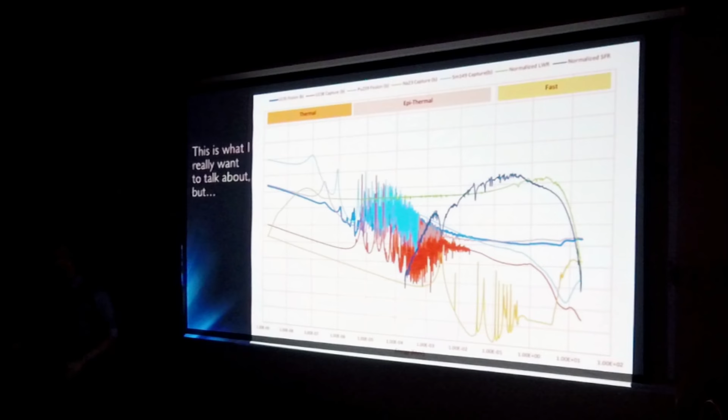So this is maybe what I really want to talk about. This is one of my favorite graphs. It's just a bunch of nuclear data, and there's so much physics in here that you can explain with just this slide. I could talk for an hour about it, but that probably wouldn't be that interesting to everyone here, although some of you might be interested. So instead, I really kind of want to lay some groundwork, and then we're going to talk about what could happen with nuclear technology.

So just to comment at the outset, I'm not a prophet of nuclear power. I'm not a true believer. There's definitely flaws; it's not perfect. There are no perfect solutions. So safety: Fukushima, Three Mile Island, Chernobyl, there have been accidents. There have been health effects from nuclear power. I'm not going to deny that. Nuclear waste is a real thing we have to deal with. Cost: if nuclear power stays as expensive as it is, it doesn't really matter if I advocate for it. No one will build it. People would rather have climate change than $14 a watt installed electricity.

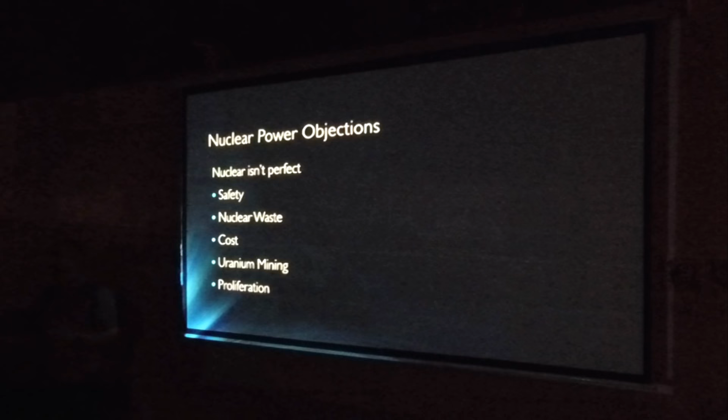Uranium mining has definitely a destructive past, and that's maybe one that could have a little bit more of a future. And proliferation is something that I actually don't personally find as compelling an argument against nuclear, but a lot of people raise it. So with all those objections, and I'm sure a lot of people have questions about those, why do I look past all of that and still believe in nuclear power?

And it's really this. So this is a screen grab of what the German utility puts out: the different sources of electricity generation by hour for a given week. And this made a lot of headlines if you're really nerdy into this space. January 2018 at 3 a.m., the headline said Germany gets 100% of their energy from renewables. And at 3 a.m. on a very windy day with low energy demand, Germany got 100% of their energy from wind and a tiny bit of solar. I think maybe it's solar thermal, I don't know why at 3 a.m.

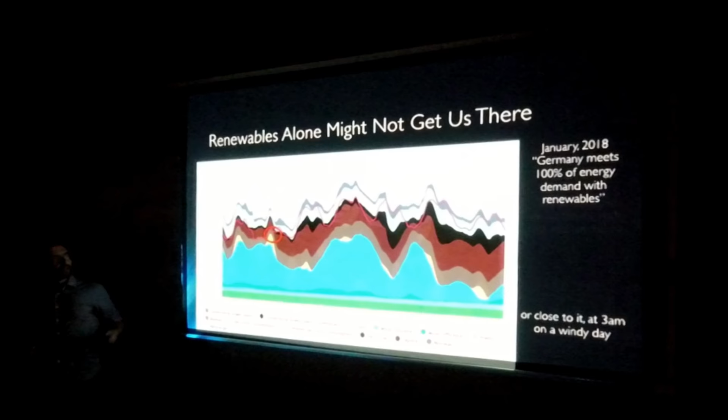But last time I gave this talk, I pulled up the week before that talk, and that was this. So this is a much more typical week. It was a cloudy week with not a lot of wind, and most of their power was from burning coal. So if we really want to fight climate change, we need a lot of power, and we need carbon-free power, or low-carbon power. So nuclear power comes with inherent risk, challenges, and costs. But tackling climate change requires us to make hard choices. There are no easy choices yet.

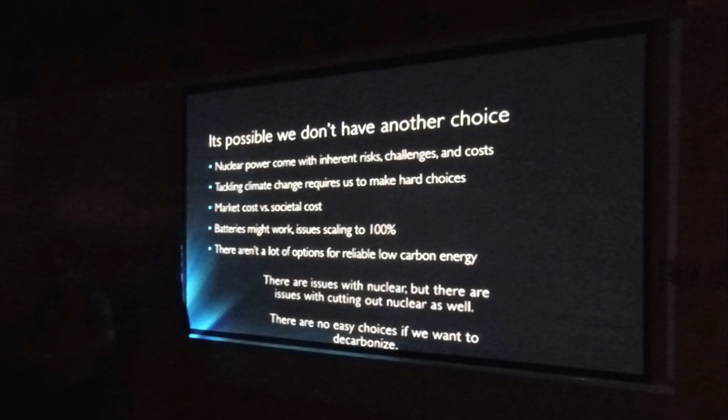Geothermal is very location dependent. There are other options at small scale, like wind, wave power, but they're not geographically scalable like nuclear is. There are issues with nuclear, but there are issues with cutting out nuclear as well. There's issues with shutting down our existing nuclear fleet. And there's no easy choices if we want to decarbonize. So that's pretty much where I'm coming from. Any point I just said can be debated ad nauseam. This is my groundwork for the rest of the talk.

So really, if you kind of buy that premise that we need nuclear, what is nuclear? What do we have today? What can we have tomorrow? So that's sort of what I'm going to talk about for the rest of this, but since I got through that fairly quickly, maybe just pause for a second. Did I totally lose anyone? No? Cool.

Oh, yeah. My question is, how do you handle situations where you need energy on demand? For instance, you might power on natural gas because it can be powered on kind of instantaneously, as opposed to something like coal that takes a little while longer. So how does this fit into that?

So as you look at scaling up renewable energy, for example, you sort of need dispatchable sources to cover that mismatch of, it's been 4 days since the sun has shone, you have this really unusually cloudy period. When you look at scaling up just pure 100% solar, you have to make this trade of how often do I want blackouts versus how many diesel generators and simple cycle natural gas plants do you want. Nuclear, you sort of assume runs as baseline. There are advanced plants that can load follow and play with renewables.

In terms of carbon intensity of, hey, I have a natural gas plant, but it only turns on once a year for 2 days. What's the carbon intensity of that versus building 10,000 more batteries? I don't know that answer, right? That's analysis I really want someone to do, but I don't quite have the time to do it. I have a feeling that there's a point where you'd say, wow, it'd be really nice if I had 20% that was always on to charge the batteries or something.

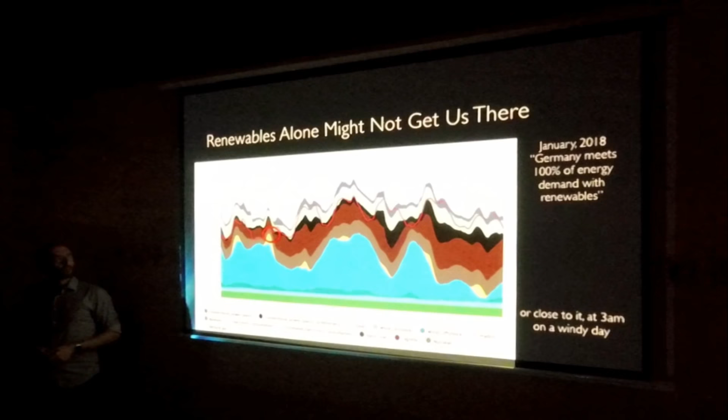Can we just go back to the slide of Germany's mix? Can you comment on the nuclear composition there? Yeah. So nuclear is, I believe this one. So Germany had somewhere like 20 nuclear reactors. Nico, you can correct me if I'm wrong. But order of magnitude there.

After Fukushima, they decided to shut all their plants down. They've shut down about 8, and they have 12 left, so it would be 20. They're about halfway through turning off their entire nuclear fleet. I want to say 100%, but I'll be conservative and say more than 90% of the energy that they've displaced by shutting off nuclear has been replaced with coal. And not high-grade coal, but low-grade coal.

So there's Germany. You're sort of indicating on Germany. There's a lot of fun articles to read out there on their carbon intensity. They're abandoning all their carbon reduction goals, even as they build solar. It's the largest expenditure on renewable energy ever over 10 years, and their carbon intensity is going up almost entirely because they're shutting nuclear down. And as they build non-dispatchable renewables, they're having to back that up with natural gas.

So Germany is sort of a pillory post of people saying, hey, don't shut down all your nuclear plants because of their carbon intensity. Everyone's like, oh, Germany hit 100% renewables, but people track renewables, and that's a big pet peeve of mine. They say renewable portfolio standards, we'll talk about in a second. It's like, hey, we have 50% renewables, but what's your carbon intensity? Well, it's gone up. But we have 50% renewables. So did that answer your question at all? Yeah, it was a more general comment.

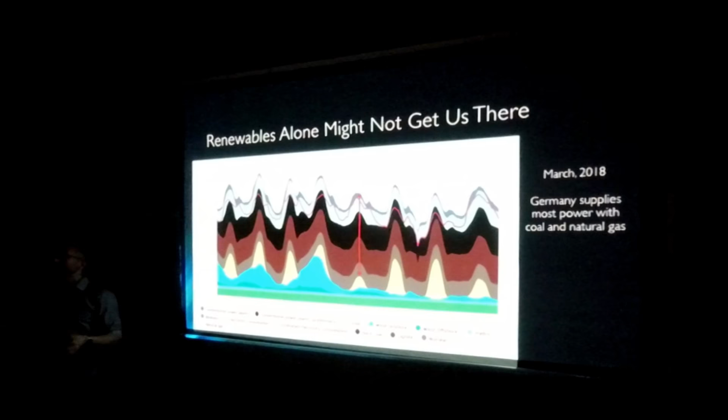So I would be totally happy, and coincidentally Steven Chu totally agrees, his ideal energy mix is like 80% wind and solar and 20% nuclear. If we maintain 20% nuclear, I'll be very happy. Right now we're looking at going to 0 in the next 30 years. And that's globally, right? The US is 20%, globally it's like 5%. So having that power to cover the night, to charge the batteries overnight, or when it happens to be a cloudy day in Morocco or Scandinavia, which happens really frequently. That's sort of how I feel about that.

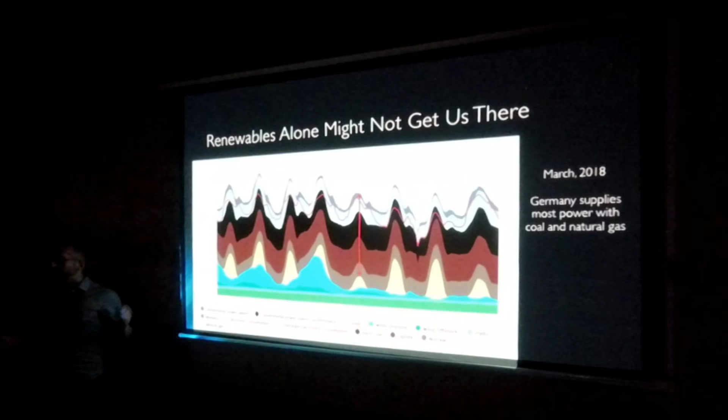So just domestically in the U.S., what is nuclear power today? There's 99 operating reactors, but a really emblematic one is Palo Verde. Palo Verde is, personally as a nuclear nerd, a super cool plant. It's the largest plant in the world that's not cooled by a natural source of water. 100% of its cooling capacity comes from City of Phoenix sewage.

So City of Phoenix sends its slightly treated sewage water to Palo Verde that cools the turbines, and then they send that back. And so if you actually drive west on 10, you will see this huge plume of steam coming out of the desert, and it's City of Phoenix sewage water.

It was one of the most recently built plants. It was built at a pretty reasonable $3.60 a watt, which is very comparable with solar, wind, natural gas plants today. I mean, natural gas can come in a little cheaper than that, but for the carbon intensity, it's pretty good

bang for your buck. The forward operating cost of electricity, so that's not counting the already paid debt, that's future debt service and fuel, operating maintenance, etc., is 4.3 cents a kilowatt-hour, which is again very competitive considering the reliability, and it produces its nameplate capacity 95% of the time compared to wind and solar, which is about 20 to 30% depending on where it is.

Who lives there? What? Who lives around the Palo Verde plant? So the town of Palo Verde is right there. I've driven there. It's actually very lovely. Yeah, people. So every nuclear power plant today in the U.S.

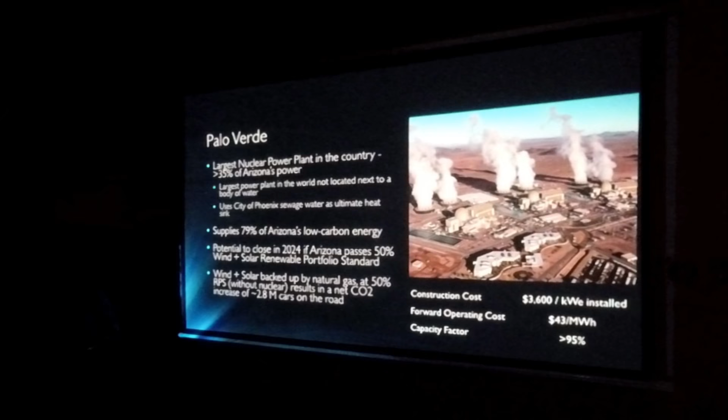And that's sort of one plant, and then domestically, 20% of U.S. electricity on average in megawatt hours is produced by nuclear. We're the largest by capacity. We have about 100 plants. France is the largest by percentage. They get about 70% of their power from nuclear. And relative to our existing low carbon sources, solar is 1.3, wind's 5.5, hydro 6.5. Those are going up, but it's just the scale.

And this goes back to when Three Mile Island happened, there were, I think, 100 reactor orders and 40 under construction. Ten years ago, we had 104 plants. Had Three Mile Island not happened, we would have about 250. We'd have about 50% of our power in the U.S. supplied by nuclear. Almost all those plants that were on order were canceled after Three Mile Island.

And that's actually one of the challenging things about economics in today's nuclear power plants: a lot of the sites were built for 6 reactors. So Diablo Canyon has cooling capacity for 6 reactors, but only 2 reactors, and that increases operating costs. So there's strong market pressures from natural gas and renewables. Being in the Bay Area, there's a lot of nuclear engineers who are like, we have to fight renewables. No, we have to work with renewables to fight climate change. We have to fight natural gas and coal. And natural gas is really cheap right now and putting pressure on a lot of generators.

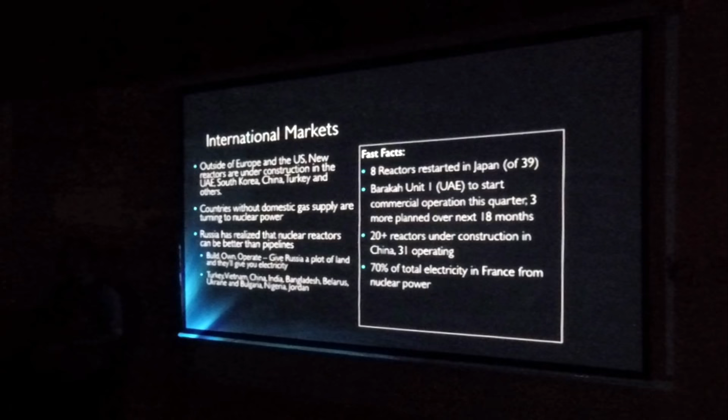So, moving forward, we can do nuclear cheaper. The TEPCO plants, those are basically generation 2. Mark 1 BWRs are plants that were designed in the 50s, 60s, built in the 70s. Mark 1 is Gen 2. Gen 1 is pretty much all offline. That was like the Navy building power plants to figure out if they could do Shippingport, things like that. Gen 2 started to get built in the 70s. Gen 3 started to get built in the 80s. Each of these are learning lessons from previous reactors, but there are 10 to 15 years between generations.

Today, Vogtle and Summer, AP1000, those are kind of Gen 3+. Vogtle and Summer, this is not a good story. Summer is now canceled. It will be infinity dollars a megawatt because the denominator is 0. And Vogtle will be like 14 to 16, fingers crossed, please don't bankrupt the entire state. If you look internationally, most focus on the USA and France. And the cost of building a reactor has actually gone up over time. There's a bunch of reasons for this.

South Korea, there's a paper by Jessica Lovering, which is really great, looking at construction costs of current gen plants. South Korea has actually managed to do something which every other industry has managed to do, which is have costs go down over time as they get used to building things. The conclusion of the paper is they picked a design, thought this is good enough, and we're going to build this thing. They've made minor tweaks to it, but it's the same plant, same construction, same suppliers, everything.

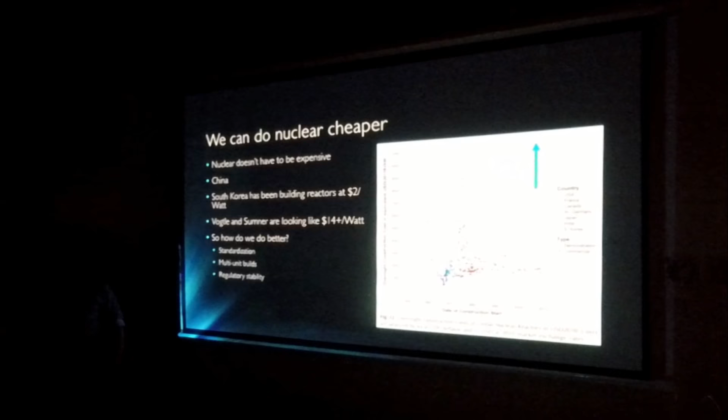Okay, well, I am definitely now behind schedule given the first one. So I'm going to try and cover some nuclear engineering basics really quickly, and then I'll try and get to sort of the next generation of nuclear technology.

What is my time? Was it 9:15? Okay. So I'll try and be done by 9:45, but if anyone has to go, I won't be offended.

So just to understand kind of what fission is and isn't. So uranium is the heaviest naturally occurring element. If you hit it with a neutron, it'll split. It'll split into 2 smaller things and release a bunch of neutrons. Those neutrons can hit other uranium elements, cause fission. That's a chain reaction. If that chain reaction sort of propagates, you're sort of stable.

The heat, the energy, the actual source of the energy is these 2 fission products slowing down. So they fission, they're moving like 3% of the speed of light, and they slow down, they release a lot of heat. That's the heat from fission. And sort of the excess neutrons keep the reaction going.

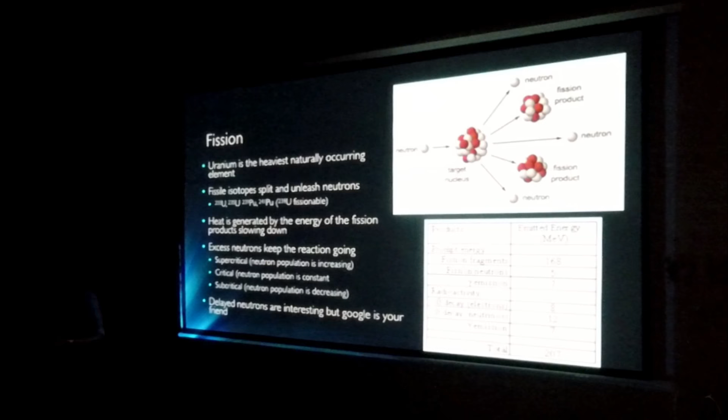So not every one of those neutrons is going to hit another uranium atom. Some will fly out, some will get absorbed in steel, some will get absorbed in water, oxygen, whatever, anything you have in there. As long as you have enough of those neutrons hitting uranium to keep the reaction going, you sort of have a nice stable power. Delayed neutrons are really interesting if you guys have like 2 hours to kill on Google, but not tonight.

So this is a basic schematic of a really typical nuclear power plant. So you have the core, that's where heat is generated. The coolant circulates through the core, goes to a steam generator, transfers heat, boils water, makes steam, steam spins the turbine, turns a generator, generator powers your PS3.

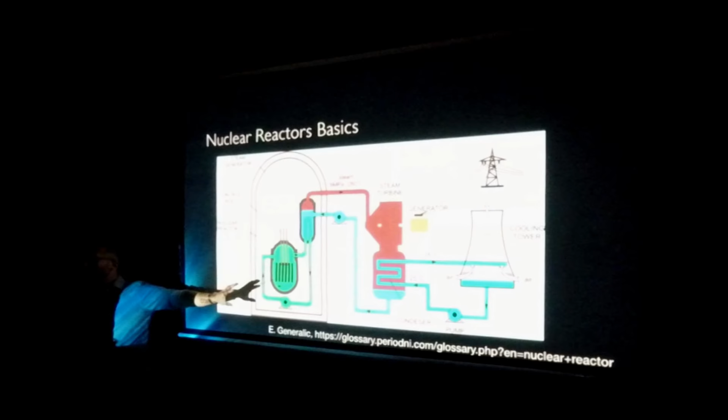And the water ends up going to a cooling tower, or if it's an older plant, an ocean. Open water cooling is definitely out of style nowadays for a number of pretty good reasons. And the water comes back to the steam generator, gets boiled to the steam turbine. If you take everything to the right of this line, this is a coal plant, right? Coal plant, you burn coal, you make steam, spin the turbine.

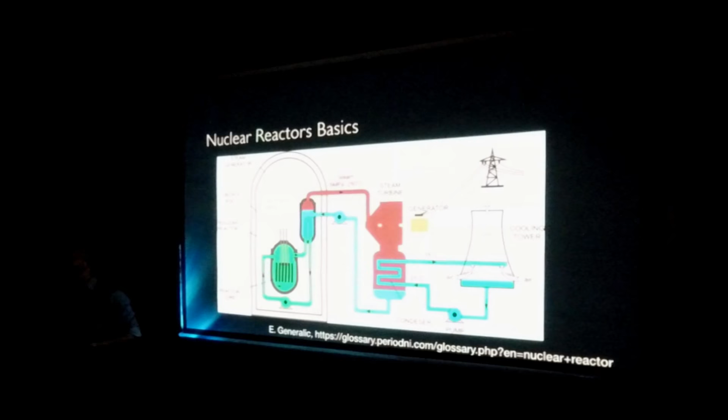The thing that makes a nuclear reactor hard is that you can't turn this off. If you cut the oxygen to a coal plant, it goes to 0 power. It's still hot, and it has to cool down, you have to provide cooling, but it's not producing any more energy. You're not adding energy to the system.

The thing that makes designing a nuclear reactor hard is when you stop the chain reaction, you don't go to 0. You go to 7%, which is a lot of power. Where that comes from is those fission products decay, and when they decay, they release heat. The fission products have all kinds of radioactive decays, and some of them are very energetic. So you continue to get heat, about 7% in normal operation, from these things that are not part of the chain reaction. They're just sitting there.

And so when you drop the control rods, you shut the reactor down. So going supercritical and exploding like a bomb is not a credible accident in any plausible modern reactor design. However, that's pretty much what happened in Chernobyl. That was a really bad design, and I would love to talk for like 2 hours about everything wrong with Chernobyl, because I think it's really fascinating. But in most Western and modern reactor designs, that's just physically impossible.

But what happens is 1 second after you shut down a typical large-scale 1 gigawatt nuclear power plant, you're producing the same amount of energy as the fuel consumption of a 747 in flight. So 747 in flight, cut the fuel lines, burn that in a fire. That's what's being produced as heat in the core 1 second after shutdown. And 1 day after shutdown, you're the equivalent of the world's largest, most powerful locomotive, just the fuel consumption of that burning as heat in the core. The problem is, 1 month after shutdown, you're only at the 9th most powerful locomotive.

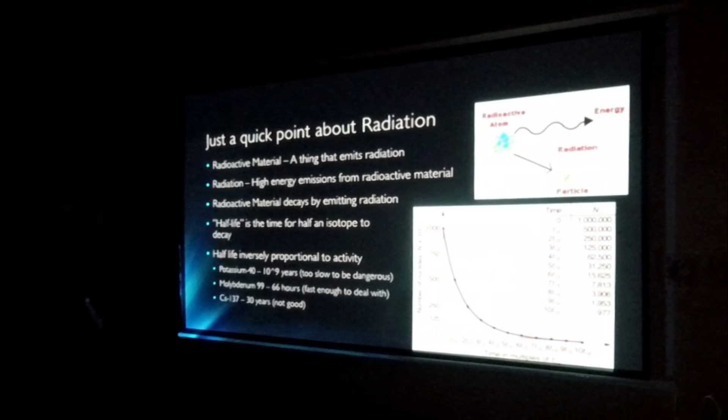I'm going to keep going. Yes. So, what are we betting on? So if you ignore all the doom and gloom and all the issues, and you really say, I believe in nuclear, we can save the world, we can make low carbon energy, what is really nuclear? This is sort of what I wanted to talk about.

So there are, I would say, 6 options. Small modular reactors, which if you've been in the space, were kind of all the craze until about 4 years ago, and they sort of dropped down a little bit. Molten salt reactors, which are like the internet's favorite reactor. Sodium fast reactors, which are physicists' favorite reactors.

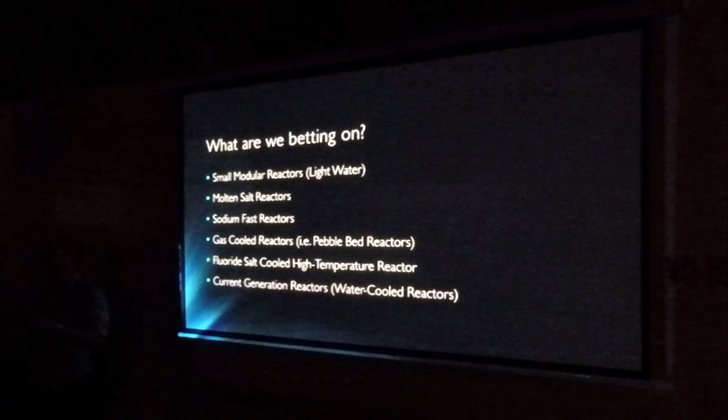Gas-cooled reactors, which, for lack of a clever name, I call Germans' favorite reactors, because Germans invented them. And fluoride salt-cooled high-temperature reactors, which is the longest name, so that's cool. That's what I work on. And a lot of people wouldn't, but I put the current gen reactors, because of everything I talked about with South Korea, and I'll get to that maybe later if I have time, which I already don't have.

So small modular reactors, what are small modular reactors? It's essentially the same technology, the same fuel assemblies, the same control rods, everything that you know works about a light water reactor, but smaller. And the reason that smaller helps is a few-fold. There are a lot of arguments people make. You can really simplify construction. You're now dealing with smaller components. You don't have to go with these specialized ones.

The reactor vessel from Palo Verde was forged in South Korea, the only forge in the world that can make 800,000-pound reactor vessels, and shipped by barge across the ocean, delivered every night, moving 30 miles by truck. It's a huge ordeal just to move that component. Going to a smaller reactor means you can make them in the United States with more traditional manufacturing technology.

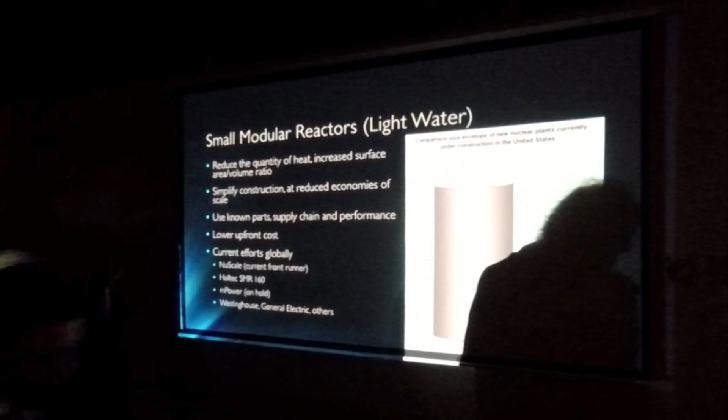But the big thing is you're really reducing the amount of heat. So if you have a 1,000 megawatt reactor, you have to deal with a 747's decay heat. If you have a 100 megawatt reactor, you have to deal with like a Cessna's decay heat. Way easier to deal with. And the big thing is really using known parts, supply chain, and performance, but dramatically improved safety. So it's all the best technology without some of the challenges.

And then the other big argument is financing costs. So if you build a 1 gigawatt plant at $14 a watt, that's $14 billion. That's pretty expensive. On the other hand, even at $14 a watt, an 80 megawatt plant is going to be a lot cheaper just in absolute terms. More utilities can afford that financing. The payback period, because hopefully you can build these things faster, is lower investment, faster time, and hopefully it makes the economics a little more amenable to both smaller economies and current financing.

How does it improve on safety? So it improves on safety in a couple ways. So the first is really the amount of decay heat, and the surface to volume ratio is better. So you're producing less heat with more surface area. You can have more cooling water.

If your reactor is really large, the center fuel pin is the one that's going to fail, because it has to move that heat out through the entire reactor that's also generating heat. If you take that reactor diameter down a lot, the length of the fuel pins, the diameter, and the fuel assemblies, it's much easier to get that heat out. So NuScale, which I'll talk about in a second, they're kind of a good emblematic one, and I have a diagram.

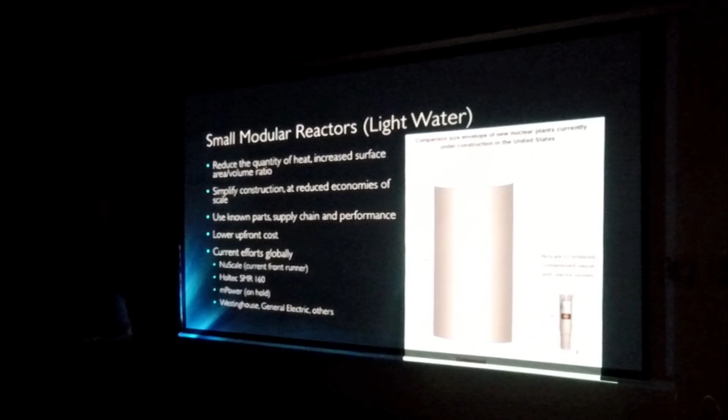So there's sort of NuScale, which is really the current front runner, and Holtec, mPower, Westinghouse, GE just made some news for something that I don't think they should have been used for. But there's other kind of people. There was this huge push to develop these SMRs, and everyone was like, these are going to change everything, and they didn't change anything because no one built them.

So NuScale, though, they have a signed contract or letter of intent, memorandum of understanding with UAMPS, a Utah utility. It's going to be co-located with a wind farm. The plant is designed to load follow the wind farm. So as the wind picks up, this plant will come down. It's like all these things everyone wanted from a nuclear utility.

And the way you see the safety is they've gone low enough power and they've sacrificed efficiency that it's powered by natural circulation. There are no pumps. And so if the power trips, nothing changes. It continues to circulate at full power. Just really reduce the volumetric power density of it. And they put these modules, these sort of self-contained modules, in a giant pool. And so there's this huge volume of cooling water and a steel lined pool and seismic reinforcements, etc.

The challenge is, so here's kind of their ultimate safety case. If you lost all power and everyone left, eventually the water would boil off, but by the time the water boiled off, the decay heat goes down, and you can cool by air cooling, and you're sort of infinite walkaway safe, unlimited walkaway safe. People have all these qualifiers, but there is nothing you need to do. You don't need to drive a fire truck up. You don't need a hose. That's the goal of every reactor going forward, is to totally change all of the accident scenarios and remove them.

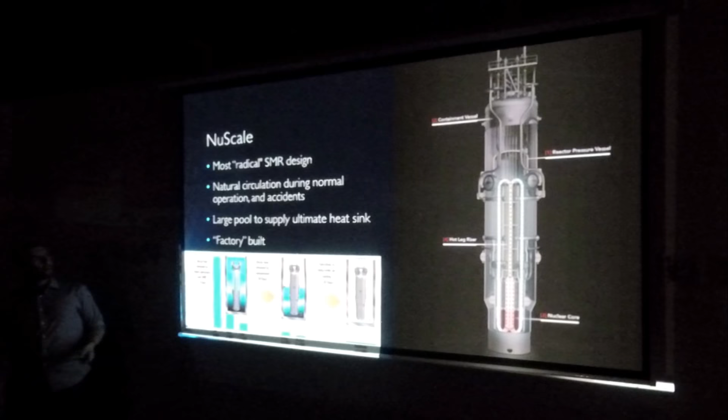So the benefits, as I said, it's an established technology base. It's an established licensing path, which is a huge deal in the U.S. People talk about licensing being really challenging, and it 100% is. And the technology challenges, the risks, the costs, the supply chain, all that's really well understood.

Ideally, these are small enough to be quote-unquote factory built, although no one's quite addressed the chicken and egg of, hey, I want to build a factory. How do I afford the factory? I'll sell a bunch of reactors. How do I sell the reactors? You need to have a factory. So that's something that hopefully can just get fixed by money, but who has that money?

And then kind of passive cooling or sort of these low power reactors really change the game in terms of safety. The big challenge is it's fundamentally the same technology limitation. So everything you don't like about water reactors is just kind of being engineered around. It's not being solved and not being changed.

NuScale is optimistically targeting $6 a watt. That's optimistically for a plant that's never been built. Not going to happen. I feel 100% confident they will not hit $6 a watt if they go forward. It's too much. They still need a ton of money to go through licensing. They're going through a traditional licensing pathway.

And many costs of nuclear build do not scale with power level. So even if you reduce the size of the power plant, a lot of licensing costs, fuel costs, security costs, they don't really scale with, hey, we have a smaller plant. The cost should be, it's 1/10 the power, 1/10 the cost. It's 1/10 the power, 90% of the cost. So that's really the challenges of SMRs. Any other question about SMRs?

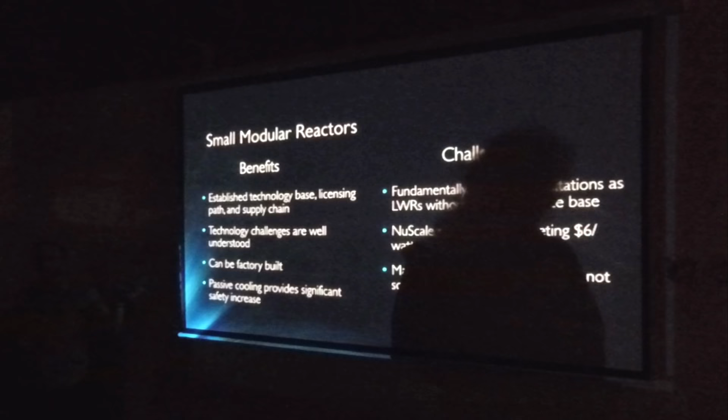We started deregulating electricity markets, which has had a lot of benefits and has been really challenging for kind of large utility or large scale electricity. So that's pretty much it. It just happened to coincide. If we shifted the clock back 5 years, and so it was like before Fukushima, before the fracking boom, we would have a ton of these. I feel very confident about that.

There's a lot of investment in them. It just happened to be like right when they finished was right when, hey, natural gas is $3 a million BTU. So that was pretty much it. There's kind of this coming at it now because people are still interested in low carbon nuclear power.

Okay. So passive cooling: the way that a traditional nuclear power plant cools is, they say you lose offsite power, you shut the plant down, and now you need to remove that decay heat. So you have batteries and diesel generators that turn on and start providing active cooling. They're pumping water through the core, pumping it through heat exchangers, removing that heat, bringing it back to the core. You have all these systems that are reliant on stored electricity, whether it's diesel fuel or offsite power or batteries. The passive cooling means you're only relying on physics.

So you're relying on water rising when it gets hotter, and that causes circulation, or your air does the same thing. High temperature things radiate. That's passive cooling. It's inherent safety rather than engineered safety is how other people define it. So for a gigawatt plant, you can't do passive cooling. It's too inefficient. For an 80 megawatt plant, you can do passive cooling, where you're just relying on water circulating, condensing, cooling, coming back. Does that make sense?

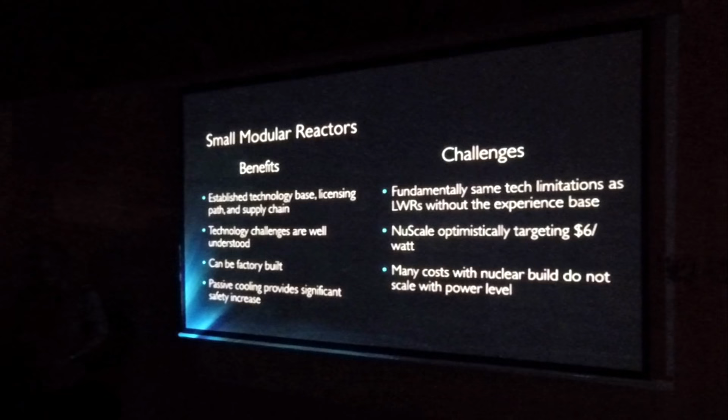Yeah. Okay. So, who here has heard of molten salt reactors? Who here thinks thorium is going to change the... Oh wow. Okay. See, I live in like a super bubble where everyone, I'm just like, no, thorium. So I won't do as much time beating down on thorium. The internet really loves thorium though. If you go on Reddit and type in thorium, there's like 4 million threads about it.

So my friend Nick Touran has a really great website called whatisnuclear.com. I highly recommend it. It's better than the talk. And he has a really good page on the truth and lies, he has a better word than lies, about thorium. So what is thorium?

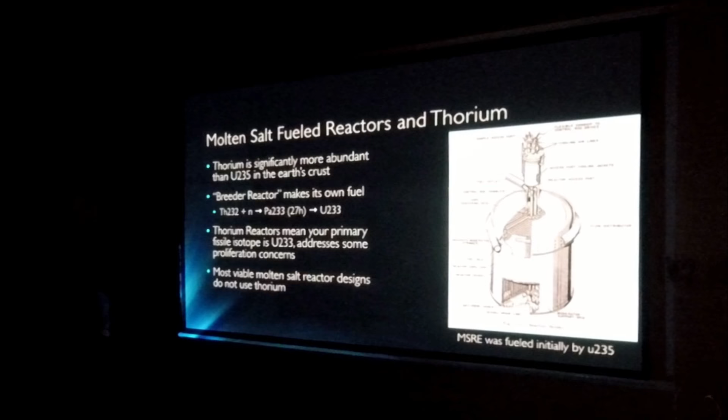Thorium is called a fertile element. So it's not fissile. You can't hit it with a neutron and get fission. But if you hit it with a neutron and you wait like 27 hours, it becomes a fissile isotope, and then you can breed fuel. There's way more thorium in the Earth's crust than uranium, and that's pretty much it. It's a means of generating more fuel than you have currently without mining uranium. People really love it a little bit more than it deserves. That's fine.

So they conflate that too. There's thorium and there's molten salt reactors. Molten salt reactors do not have to use thorium. Thorium does not have to be used in molten salt reactors. Molten salt reactors were first invented for the aircraft reactor experiment, which is before ICBMs: how do you bomb the Soviets with a really reliable bomber? Nuclear power. So this is a spherical nuclear reactor surrounded by a spherical shield connected to 4 jet engines.

They built this in Ohio, Cincinnati. They still have the test stand set up. GE, and there's another one in Idaho. They really planned to do this. Actually, I'm going to take this tangent. One of the ways they tested how the shielding worked was not build this thing on the ground and stand really far away and say, hey, the shielding works. They built it, put it on a plane and flew it overhead, and they're like, the shielding works. Yeah, that was a bad idea. But anyway, they're really cool from a nerdy engineering standpoint, less so from an aircraft reactor experiment standpoint.

So it's possible to run a molten salt reactor. What a molten salt reactor is, I guess I haven't said that: think about a light water reactor. It's fuel pins, solid fuel, metallic fuel, sort of, with water running by to cool it. The water boils and produces steam. A molten salt reactor does not use water as cooling. It uses salt. So think table salt. Now think table salt at 800 C. It melts. It becomes a liquid. It's a really high temperature liquid. It's really stable. It does not boil.

This is sort of a schematic of an MSR. So you have a core. The core is just a big region where the neutron leakage is low, and so you have enough neutrons flying around to create fission heat. That makes your fuel salt hot, so this is fuel and coolant. You flow that through a heat exchanger to have a buffer region. You flow that around, and then you run a gas or steam system or whatever. That's the basics of how a molten salt reactor works.

I won't talk about the freeze plug, but no one's going to use a freeze plug in practice. But has anyone heard of it? Does anyone understand why freeze plugs don't work? Okay. Basically in 20 seconds, here's how the freeze plug is supposed to work, and this is how the test reactor worked. It has air cooling going through a pipe at the bottom of the reactor. You lose power, or any accident happens, the freeze plug melts, the salt drains out of the core. It sits in these cooling tanks, passive cooling, subcritical, whatever.

That's true, and that's how the 8 megawatt reactor was built. If you actually look at the economics of this, you now have twice the reactor vessel qualified material surface area, and you have to excavate a tank below your reactor that's seismically qualified. It basically has to go to the same qualification as your reactor. These things can get really hot safely, and dropping control rods is really easy. So everyone who's credibly looking at MSRs doesn't use the tank, but everyone on YouTube really likes the tank, so I have to hate on it.

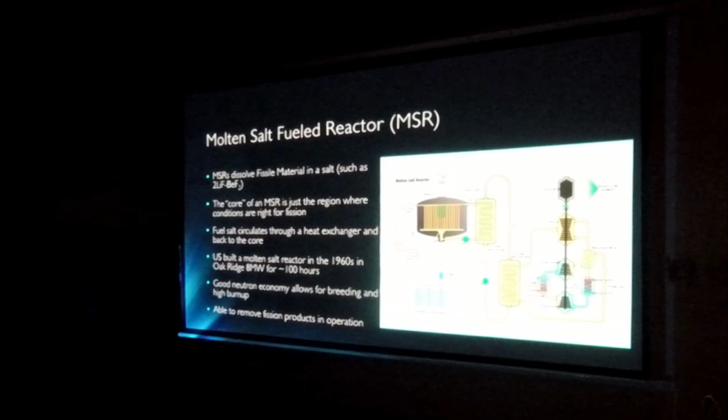With a molten salt reactor, the xenon would boil out. Essentially, it's a non-condensable gas, and you can continually remove it in operation, which means you have a much safer reactor and a much better operating reactor. So the benefits of thorium molten salt reactors: there's no possibility of meltdown. There's a really strong negative temperature coefficient, but every reactor has a strong negative temperature coefficient.

Low pressure, no containment, that's a big deal. So if these things have an accident, and you can define what an accident is, it's really very contained by physics. Even if you remove the top from this thing, there's not a lot of stuff that has motive force to get anywhere, because it's operating at atmospheric pressure. Because you have really good neutron economy, you can make use of fuel. You can convert or breed. You can convert thorium. You can make plutonium if you wanted to.

So it eliminates some proliferation concerns. Uranium-233 is bad for weapons, and if you breed from thorium, you end up with uranium-233. However, there's this whole argument that takes a second to get through, but if you trust someone to not put uranium-238 into this thing, you already trusted them to build a reactor and operate it.

If you put uranium-238 into this thing, you'll make a ton of plutonium. That's really easy to extract and very good quality. And people tend to ignore that. They say, oh, well, we're just going to put thorium in. It's like, well, then you already trusted people not to breed plutonium from some other means when they readily could have. So maybe I didn't make that argument concisely, but catch me after.

High temperature, high efficiency is a big thing. So the major challenge with molten salt reactors that people don't talk about is corrosion. When you have a molten salt reactor, you have every element in the periodic table in contact with your structural metal. If any of you have done structural materials, it's really challenging because you can't get chemistry control. And so the US built a reactor, they operated it for 2 years, and maybe it could have lasted for 3 or 4 before they started to just completely corrode everything.

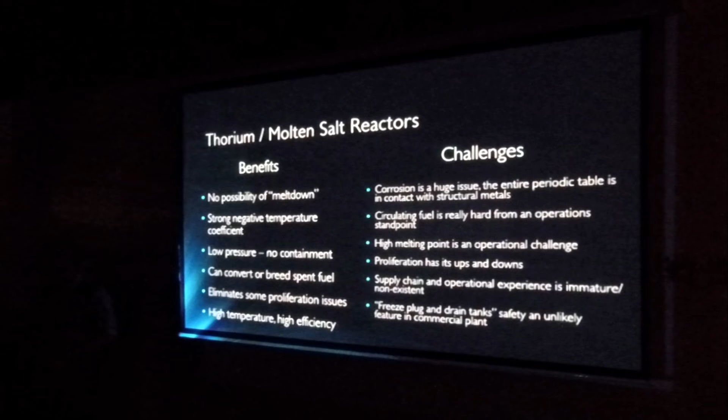So lead bismuth, sodium. I call them sodium fast reactors because that's the most prominent technology, but it's basically the same for lead bismuth. Those are all similar. Russia's done a lot with those, and people have looked at them. I think we should build these, but I'll talk about them. So liquid metal, so lead bismuth, sodium, but really sodium is the one that's gotten the most attention.

Fast reactors. The thing about fast reactors is they operate with totally different physics from thermal reactors. Every other reactor I've talked about, every other reactor that's pretty much operating in the world outside of Russia is thermal spectrum, which means they slow the neutrons down, which creates very predictable physics and makes the reactors very controllable, easy to operate, easy to analyze. Fast reactors take the opposite. They say, I'm going to leave all the neutrons fast.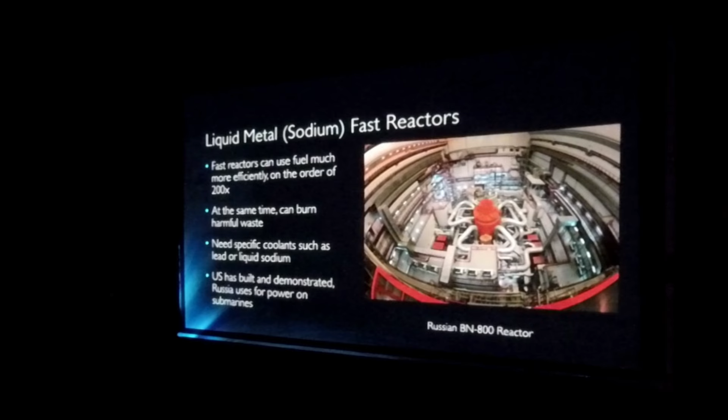And China is or was looking at them as well. But these have been built at fairly large scale. So this is kind of what I was trying to show before. I think I'll skip the graph. Yeah, I pretty much explained that.

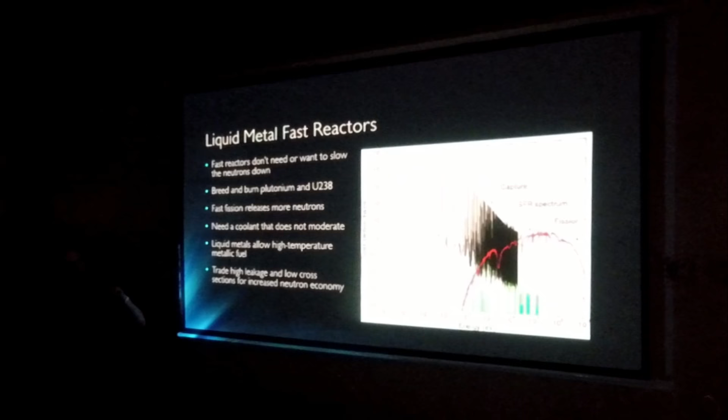So sodium fast reactors, the benefit is really improved fuel utilization. So you put in a little bit of uranium, you get a lot of fuel out. You can burn spent fuel and waste. It requires you to reprocess, but you can get rid of excess fuel.

So inherent passive safety, they have a lot of those same features that the molten salt reactors have too, because they can go to higher temperatures. High temperatures, negative temperature feedback, so they'll shut themselves down. And because the coolant doesn't boil, you can go to higher temperatures and let natural circulation or natural cooling means cool the reactor, and so you don't have the same kind of shutdown heat removal issues.

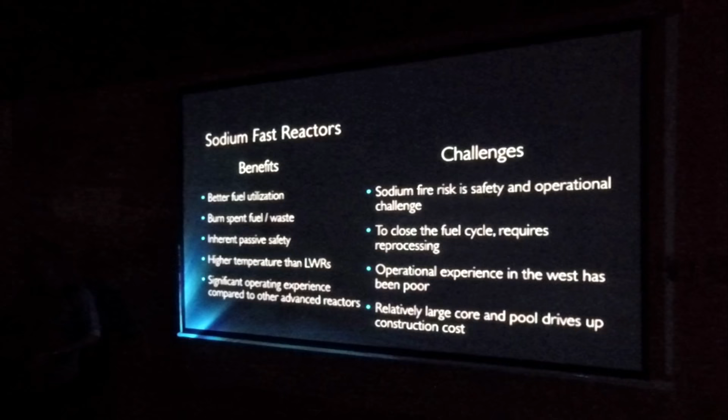Higher temperatures than LWRs, so these typically go about 500 C, and there really is significant operating experience, though it is somewhat challenging. France built a reactor that had operating experience, and it was not good, but they built it. I forgot to mention that. So the challenge is sodium fire risk. Sorry?

Sodium fire is a safety and operational challenge. You have to design against a sodium fire. Even if you can contain it, you still have to deal with it in design, cost, things like that. To close the fuel cycle and to get that really great fuel utilization requires reprocessing, which is the same way you would make weapons-grade plutonium or anything else. And it's an activity that's dangerous, hazardous, and generates a lot of toxic waste. So there's a reason to not do it.

Operating experience in the West has been poor, although Russia's managed to figure out a way to run these. And these things are relatively large in physical size. They're about 3 to 4 times the size of a light water reactor, and so you have to go to different construction techniques, different excavations, things like that.

When I say I think these are things we should build, I really don't talk about it in the broad scale. This is really a way to make fuel, a way to deal with waste, rather than building these on every corner. I think we can figure out how to build these better and larger. There's a lot of reasons to do so, but I'm not sure these will work out for building for small towns and things like that.

The thing about lead bismuth reactors and lead-cooled reactors is you get that really high fuel utilization, so you can almost make what's called a nuclear battery. So you can put in enough fuel to just have something welded shut for 30 or 40 years to generate electricity without a refueling outage, if you're operating at fairly low power. So you can get some cool physics going on to make that work, and pretty much the only way to do that is with lead or sodium fast reactors.

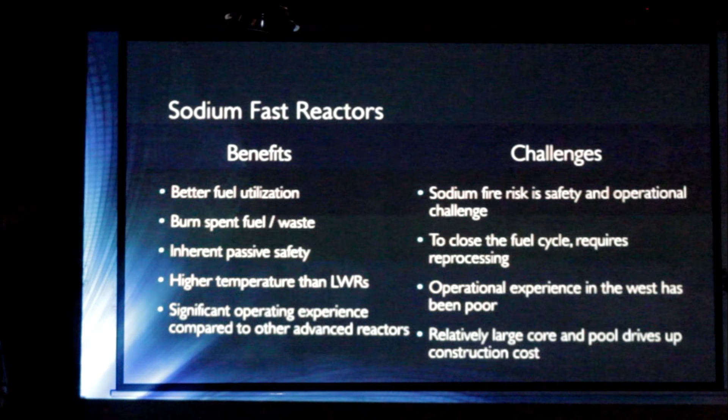But American submarines are PWRs. Shippingport was the first reactor in the U.S. That's really the technology base in the U.S., the pressurized water reactors, like that diagram I showed. And most Russian submarines are also water. Just a few. Anyone else?

Gas-cooled reactors, pebble-bed reactors. I'll go through this a little quicker. The cool thing here is about TRISO fuel. So the Germans invented this stuff called TRISO fuel. And the basic idea is the containment that I talked about before, this huge concrete structure that assumes that your water boils and explodes, releases a lot of energy, you want to contain that.

What TRISO is, you take the fuel and you surround it by silicon carbide, this crystal structure that's really strong, really high retention capability for radionuclides, and it keeps all of your waste in one place. It keeps all the fission products in one place, and so I call it inverting the containment logic. So rather than building one really large containment, you're building a million really small containments.

And that creates a different kind of failure mechanism. Okay, you have a containment, it's either intact or failed. If it's intact, everyone's happy. If it's failed, everyone's unhappy. With TRISO fuel, you have 10 million containments. So if 10 to the minus 6 of them, or 1 out of every million of them fail, you have an insignificant release, just because it's only 1 millionth of your fuel that's releasing fission products.

And so these become easier to build in a lot of ways than containment domes, because you can make these in an assembly line, you make these in a factory. So this is 1 millimeter in diameter. You have fuel, you have a few buffer layers, and you have silicon carbide. And you pack these into spheres. You pack those spheres into a core, and that's what your core looks like. You can also do these as traditional fuel assemblies, but pebble bed has been where most people have gone.

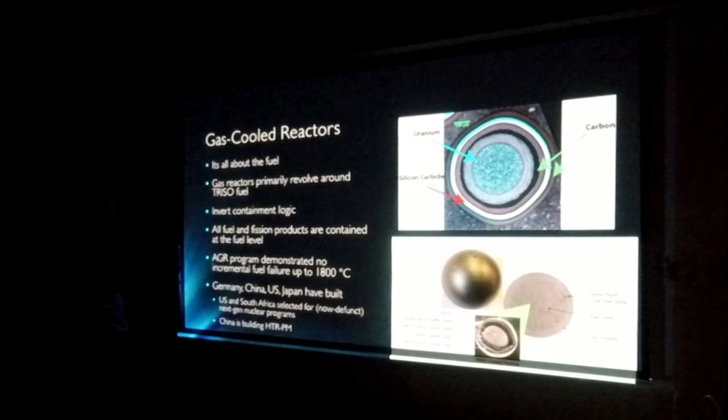And so the benefits, so TRISO fuel, that's the name of those fuel kernels, is pretty impressive stuff. It leads to this kind of inherent safety and containment, as you've taken the challenge of nuclear safety from your construction project to your supply chain, essentially. The other thing is because you have these pebble fuel, you can be pretty clever if you want and do what's called online refueling. So you're taking spent fuel at the bottom, putting fresh fuel on the top, and you don't have to shut down for refueling outages, which means you can get even higher capacity factors than like a light water plant, which has a typically 1 to 2 month long refueling outage every 18 months.

And again, simplified nuclear safety. There's no coolant. These things are already in a configuration for passive safety when you shut them down. They'll cool themselves down and sit there. So the challenge is gas is a really inefficient coolant. So even at really high pressure, you are still dealing with the fact that gas doesn't have a lot of stuff to get hot. And so generating steam from that requires you to circulate a lot of gas, and that's just a challenging process to make economically efficient. Because these things operate at kind of low power density, you can only generate so much heat from a single ball without kind of reaching that 1800 C for some of the kernels.

So you have to have these really huge structures. So that's challenging from a supply chain perspective and a construction perspective. Some of these things are 20 meters tall, 5 meters in diameter. So that's just big. And they operate at really high pressure, and so you have all of your systems and components that operate at that pressure. It becomes an operational challenge. Pebble handling is complex. If you don't do pebble handling, you have prismatic fuel. That's also complex, where you basically have more traditional fuel assemblies, but because the power density is low, you have to be shuffling these things around and replacing them fairly often.

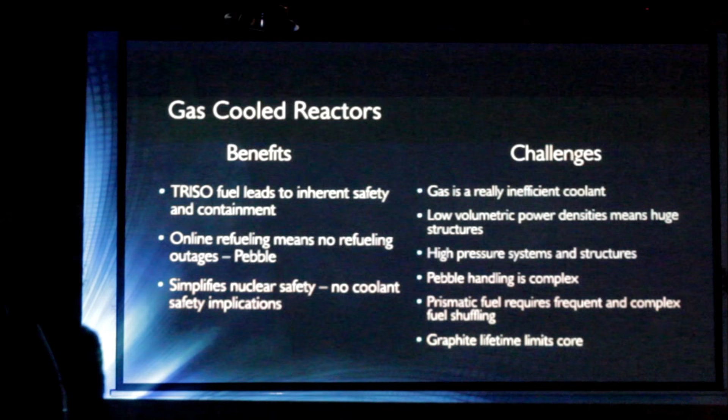So I'll just briefly mention this. This is what I work on. Fluoride salt-cooled high-temperature reactor. Because it's what I work on, I'm not going to talk about it that much. It's also really recent. These haven't been built or proven or demonstrated. It's more experimental. The fundamental concept is you take the coolant from the molten salt reactors and the fuel, the TRISO, from the gas-cooled reactors, and combine them.

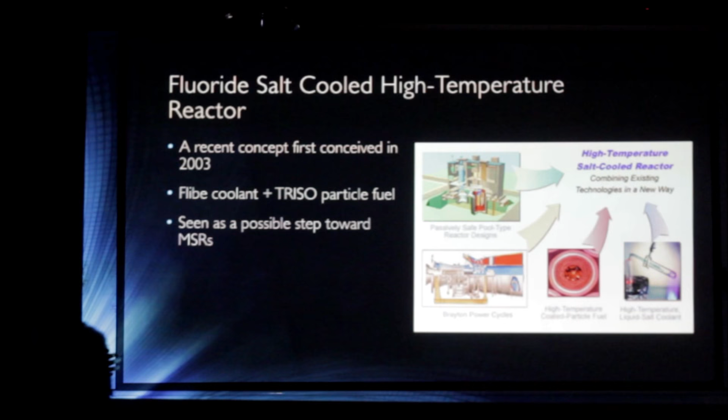So you get the efficient coolant, the power density and everything from the molten salt reactors, but you have the fuel without the challenge of circulating fuel like you do in a molten salt reactor. You don't have the challenge of a really bad coolant like you do in a gas reactor. That's the premise. That's the promise. And a lot of people who've looked at eventually going towards molten salt reactors, developing the chemistry, chemistry control is easier because you don't have the fuel circulating. And so people have proposed these reactors as a step towards molten salt reactors.